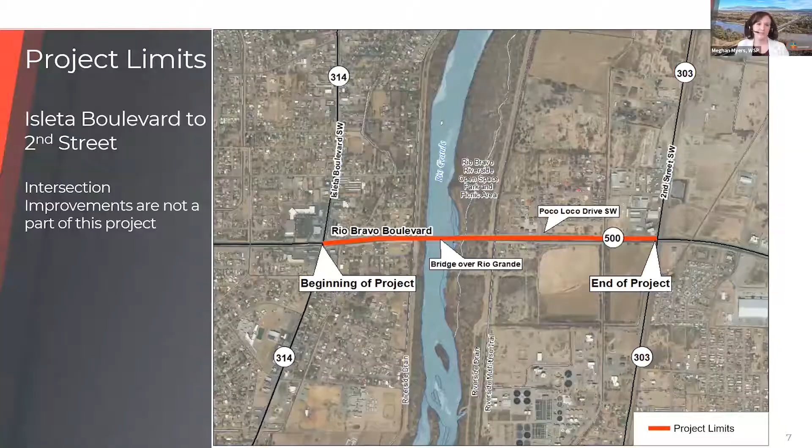Next, I'll pass things to Jill to give a brief overview of some of the ongoing work that has been happening on these bridges.

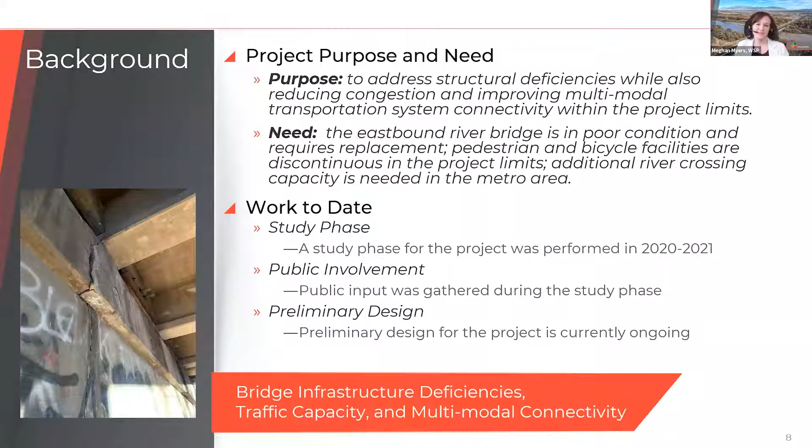At the end of 2019, one of the NMDOT bridge inspectors noticed a bump on the bridge deck that led to an emergency inspection of the eastbound Rio Bravo Bridge over the Rio Grande. It was discovered that the bridge pier was in need of immediate repairs. Traffic closures were put in place to remove loads from the bridge for the safety of the traveling public until the repair could occur. We know how frustrating this was, especially when you were driving through and not seeing the work that was being completed.

During the repair, work was occurring under the bridge, and since sections of the bridge had to be lifted off the pier, the eastbound bridge had to be closed to traffic completely. Since this was an emergency situation, the project had to move forward as quickly as possible.

This upcoming project we are discussing tonight is different. In contrast to the emergency, this project was programmed during the 2018 statewide transportation plan update. It is not in response to that emergency, but because of the condition rating of the bridge and the fact that it is at the end of its overall lifespan.

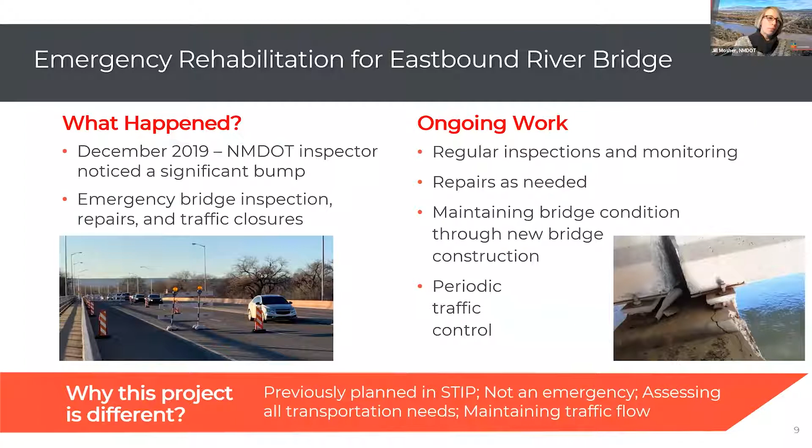Next, I will recap some of the topics we covered and the feedback we received during the previous public meeting that was held for this project.

During the study phase for the project, a public meeting was held on December 9th, 2020. During that meeting, we reviewed various treatments and alignment alternatives being considered for rehabilitation or replacement of the bridges. This meeting was recorded and is still posted to NMDOT's YouTube channel for anyone who wishes to watch or rewatch it. A MetroQuest survey was also performed to gain public feedback on important issues and aspects of this project.

The project team received lots of public feedback through submitted comments as well as through the MetroQuest survey. Here you can see some of the key concerns and topics of interest from this feedback, including focuses on safety, environmental impacts, traffic, and noise.

A desire to have construction start and end as soon as possible was expressed, while also prioritizing safety. Public feedback also included concern over ensuring there would not be complete closure of the bridge to traffic, the expected increase in level of traffic on Rio Bravo, and access to trails and parks near the bridge. Environmental impacts, including noise concerns, were also a common theme in the feedback we received.

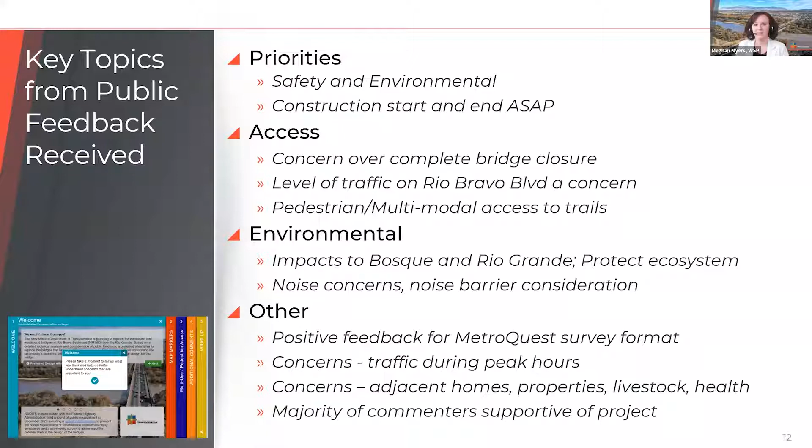NMDOT and the project team carefully consider the feedback received from the public, along with other key factors, when choosing a preferred alternative to advance from the study phase. We'll elaborate more on the alternatives being advanced to the design stage in the next few slides, but some examples of how the concerns were taken into account are shown here. For example, a straight, partially offset bridge was chosen for the replacement, which requires fewer impacts to the bosque and properties than some of the other alternatives.

A 14-span bridge is being advanced, which reduces the number of piers impacting the river from the existing condition. There will also be no full closures of traffic during construction, including maintaining 2 lanes of travel in the peak travel direction. Lastly, a noise study has been performed to determine the areas where noise barriers would be feasible and able to reduce the noise decibel level. Continued evaluation of the reasonableness and cost effectiveness of these locations will be performed during the design phases of the project.

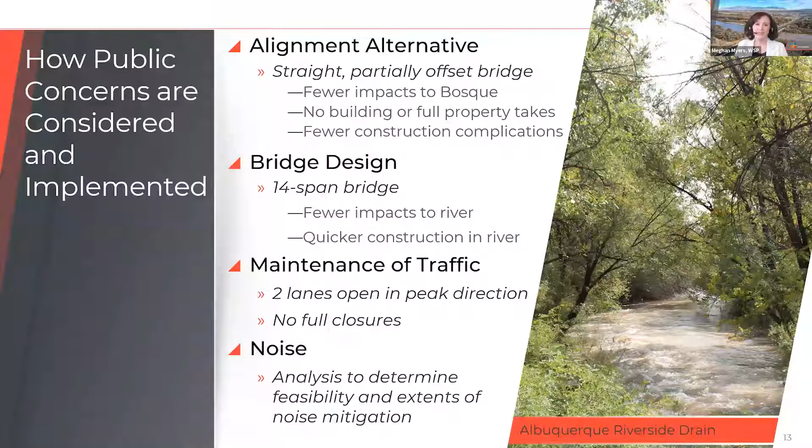Next, we'll give some more detail regarding the proposed improvements for this project. The recommended alternative being advanced to the design stage of the project includes the following.

As I mentioned before, there will be a new 14-span bridge that will be constructed using steel girders with a concrete deck that will carry both directions of traffic across the Rio Grande. The bridge will be offset to the north from the current bridge location by about half of the bridge width.

A new 2-span bridge will also cross the Albuquerque Riverside Drain to the east of the river bridge. This bridge will be a concrete slab bridge carrying both directions of traffic, and the open drain below the bridge will be replaced with a closed pipe culvert. The current drain and overhead bridge that's there now can be seen in the middle photo on the right of this slide.

The concrete box culvert on the west side of the river that carries the local access road underneath Rio Bravo Boulevard will be removed. This culvert and access road can be seen in the bottom right photo on the slide. In the new configuration, the access road will instead cross under the first span of the new bridge, making access to the south side of the bridge a little easier.

Pedestrian access will also be reconfigured at both ends of the bridge to provide new inclined walkways to bring pedestrians down from Rio Bravo to the riverside trails below. This will improve connectivity around the popular park and trails in this area, and we will show a bit more detail on these improvements in a few slides.

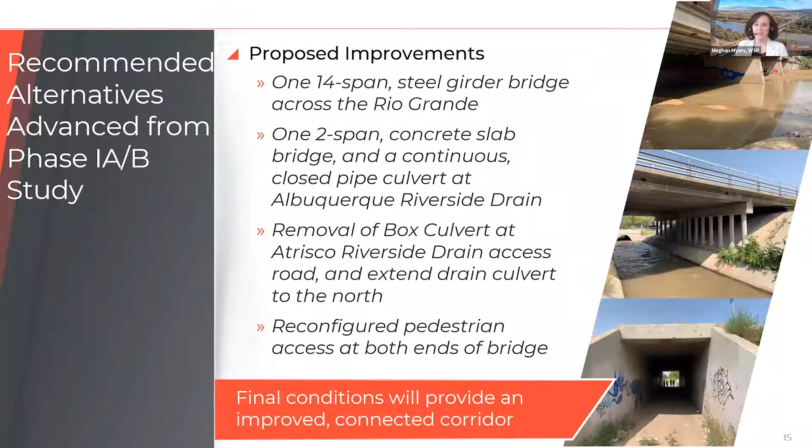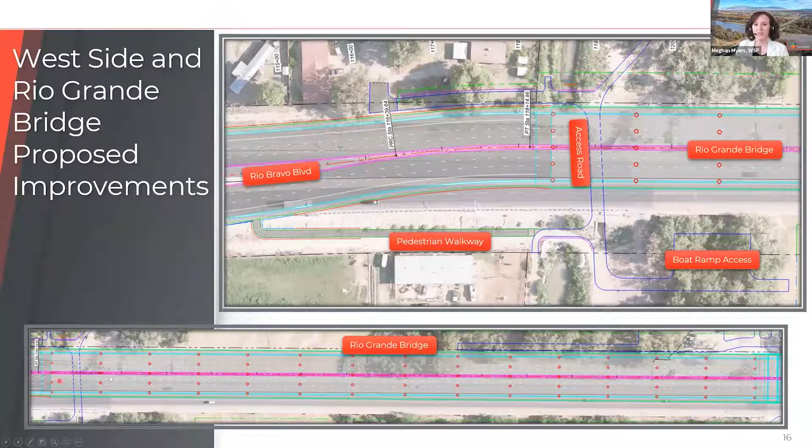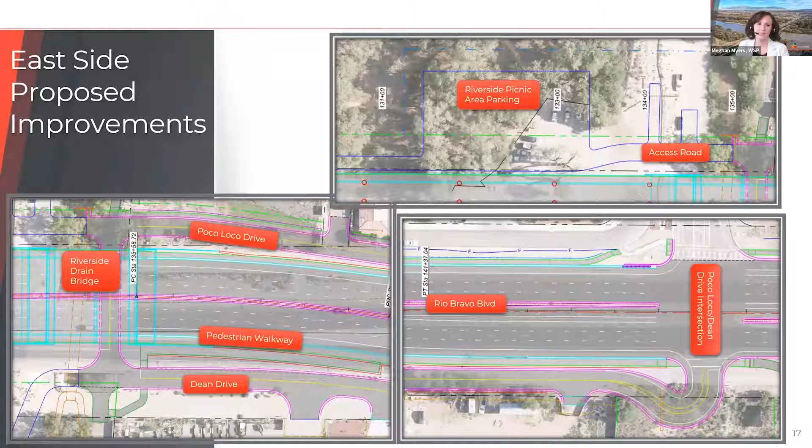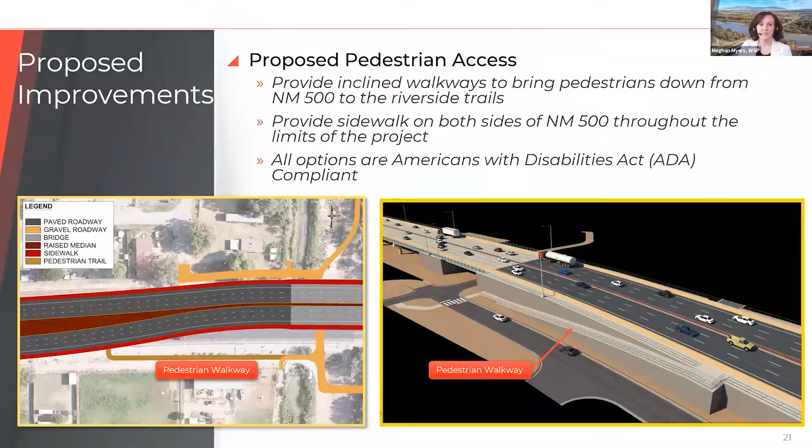And with that, I will turn it over to my colleague, Jim Heimann. Thanks, Meghan. I will summarize key aspects of the maintenance of traffic during construction and adjacent construction projects along Rio Bravo Boulevard.

As Meghan indicated, the new bridges will be offset to the north of the existing bridges. The first major construction phase will be to build the north half of the new bridges as close to the existing bridges as practical. The new north half will include a sidewalk and enough width for 3 travel lanes. Traffic will remain on the existing bridges while the new north half is constructed.

Tying the new offset bridge into the existing roadway may require lane reductions in the westbound direction. These are the transition areas, and lane reductions are expected to provide enough room for the equipment machinery, as well as to provide a safe work zone for construction workers.

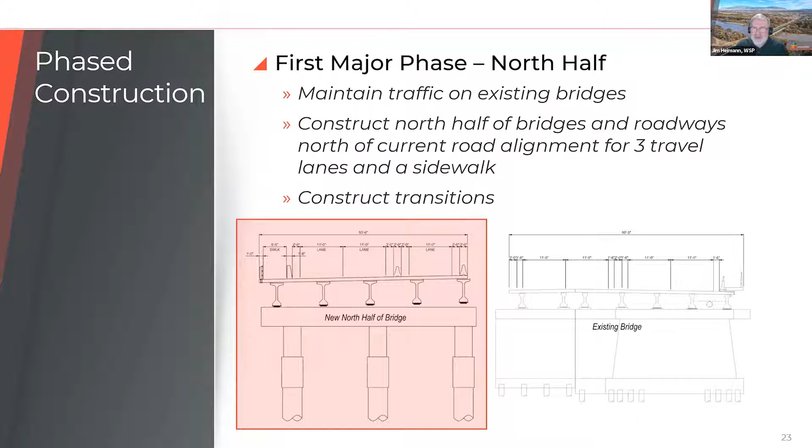The second major phase will be to demolish the existing bridges and construct the remainder of the new bridges, or the south half. Traffic will be moved to the newly constructed lanes on the north side. Movable barriers will be used to provide 2 lanes in the peak travel direction, 1 lane in the lower volume direction. This is expected to be 2 lanes eastbound during the morning hours and 2 lanes westbound during the afternoon hours. There will be several subphases to these 2 major phases. The actual construction sequence has not yet been determined.

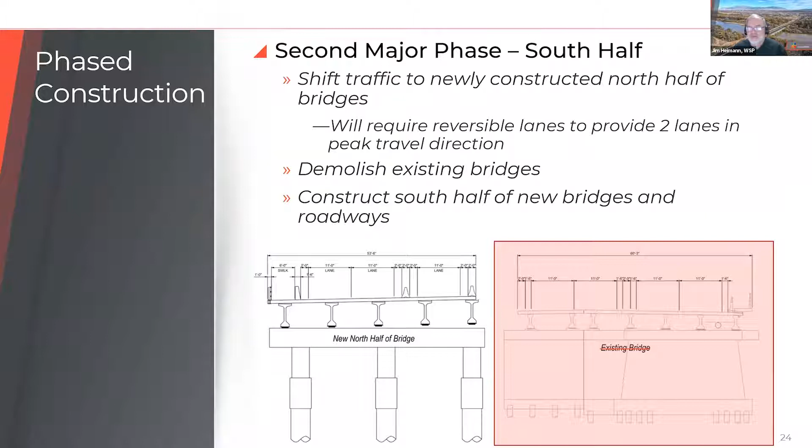This slide illustrates the movable barrier on the new north half that will have 3 travel lanes. The road zipper is a specialized machine capable of moving the wall barrier to provide 2 lanes in the peak travel direction. It is expected that this operation will occur twice daily.

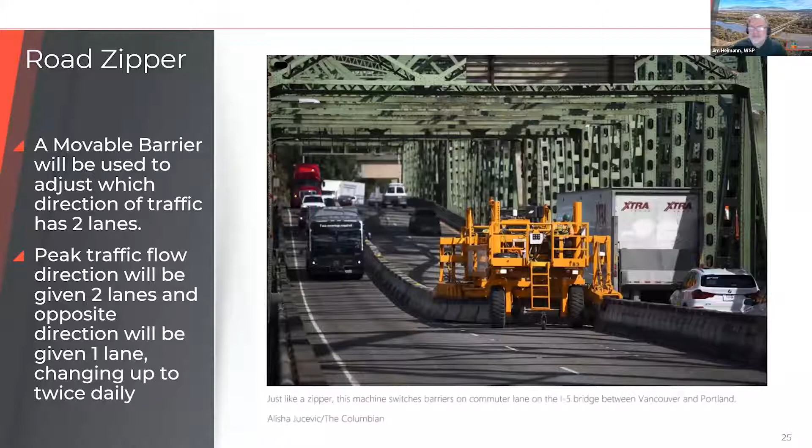Pedestrian and bicycle access will need to be maintained consistent with how these movements are accommodated today. This includes crossing the river on the bridges and crossing Rio Bravo on the local roads. Because the first major phase utilizes the existing bridges, pedestrian and bicycle travel will be much like today. However, the Riverside Park on the east side will be impacted by the new north half of the bridge because of the offset to the north. The details of how the Riverside Park will be maintained have not been determined yet.

Some disruption should be expected, including full closure of the picnic and parking area on the north side of the existing bridge until the north half is completed. This will be coordinated with Bernalillo County, who administers the picnic area.

The second major phase will utilize the sidewalk on the new north half of the bridges and along the north side of Rio Bravo Boulevard. Access to the Riverside Park should be better after the north half of the new bridge and roadway are constructed.

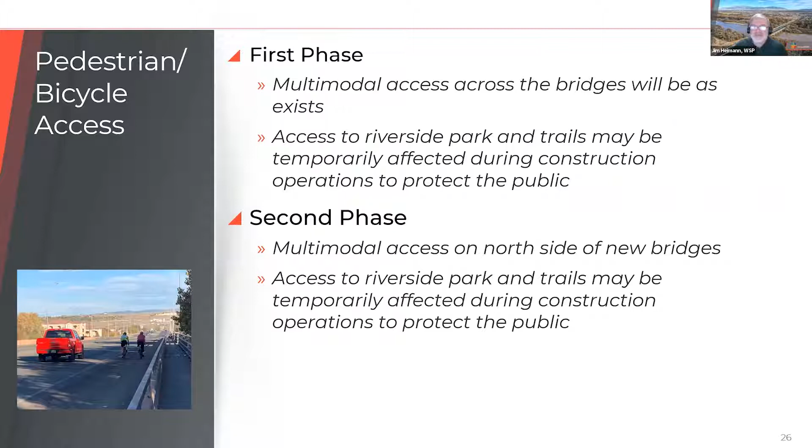When the bridge over the Albuquerque Riverside Drain is built and when the Albuquerque Riverside Drain is converted to an enclosed culvert pipe, full closures under Rio Bravo Boulevard are expected to be necessary. When this occurs, a temporary traffic signal will be provided at Poco Loco Drive intersection to facilitate crossings of Rio Bravo by pedestrians and bicyclists.

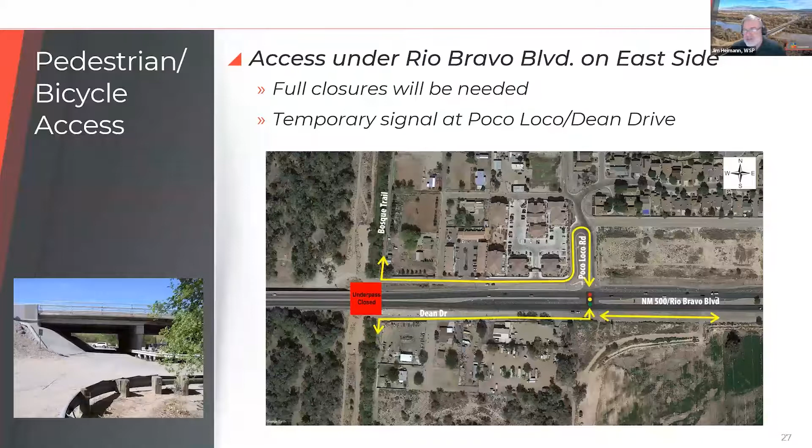Bernalillo County is developing 2 projects immediately east of the bridge replacement project. This includes the Rio Bravo 2nd Street intersection and a project referred to as the GAP project, which will complete the 6-lane Rio Bravo Boulevard roadway between the 2nd Street intersection project and the I-25 Rio Bravo interchange reconstruction project, which ended in the Prince Street South Diversion Channel area.

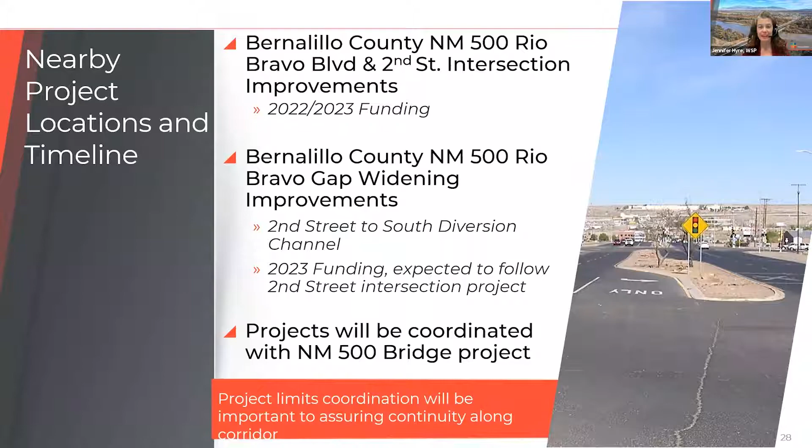When all these projects are complete, Rio Bravo Boulevard will have 3 lanes in each direction and sidewalks or trails from Isleta Boulevard to I-25. With that, I will turn it back over to Jennifer. Thanks, Jim. Next, I'm going to talk a little bit about the NMDOT's process for developing projects and the project schedule.

Currently, we're in the environmental analysis and preliminary engineering stages of this project. This is called Phase 1C and 1D by the NMDOT. During the study, Phase 1AB period, we identified what improvements were needed and why, and we evaluated the options that could be feasible to carry through to design and eventual construction.

After the prior public meeting held in December 2020, we incorporated the public and stakeholder input received to identify and advance the preferred option. We are continuing to refine the project elements and are working with our stakeholder agencies, such as Bernalillo County, MRGCD, and Bureau of Reclamation, to name a few, and your input is key to helping us further refine the preliminary engineering design and enable us to work towards drafting final design plans.

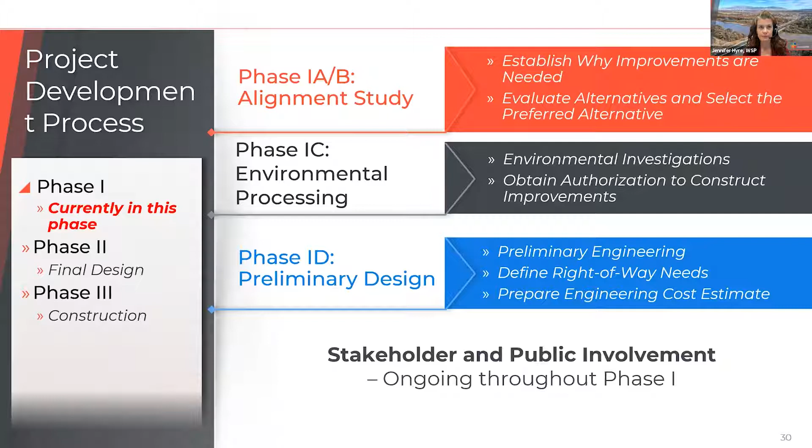Next, I'm going to talk a little bit about the schedule of the project. The project began in spring 2020 with the Phase A-B study. We then collected data to develop conceptual alternatives that were presented at the study phase public meeting in 2020. We completed the study in summer of 2021, at which point NMDOT had a preferred alternative to advance.

Into preliminary design and environmental analysis, which we've been doing this past year and into tonight for your input. We will incorporate the feedback received and continue to advance the project. The goal right now will be to finalize design roughly 1 year from now, with construction starting pending availability of funding.

Our next steps in the process will be to gather input from the public today and after our event. We've already been gathering some of that public input, and for those of you who have already sent us your comments or called us, thank you very, very much. It's very helpful. We will also be completing the environmental studies and the documentation, continuing to refine the design plans and develop final design plans. We'll identify right-of-way acquisition needs, and we'll prepare the project for construction letting.

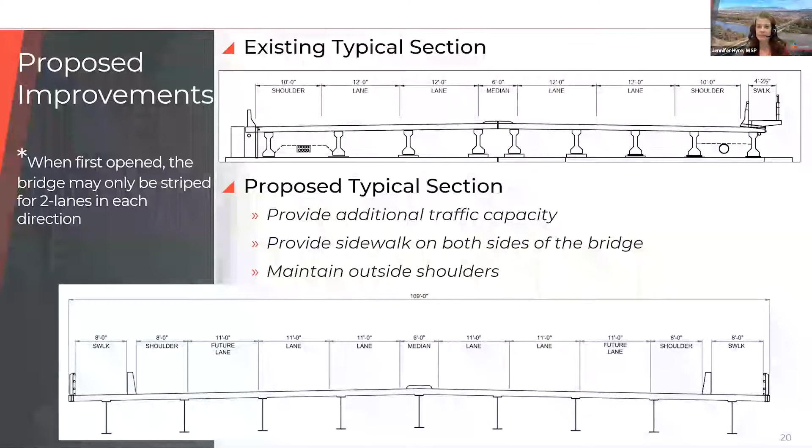Yes, I think -- thanks for the slide. You can see here, this is what the typical section will look like. So there will be a solid barrier between that walkway across the bridge. And as Jim mentioned in response to an earlier question, that barrier doesn't continue all the way along the corridor -- it will end, I think, around the Poco Loco intersection, but across the bridge there will be that divider.

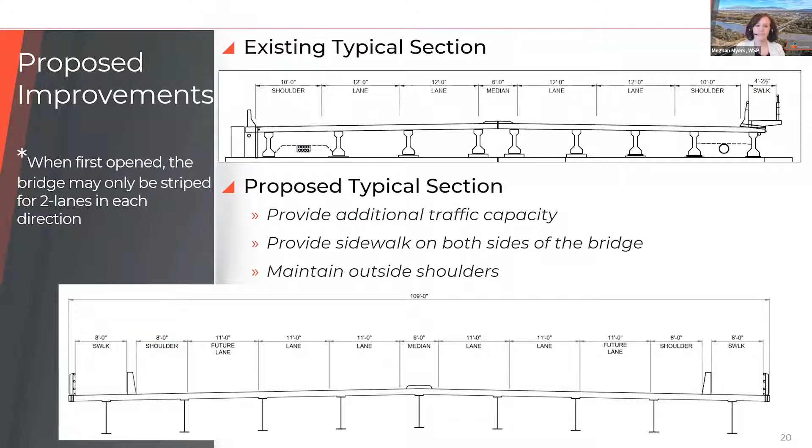Great, thank you Meghan. Another question from one of our online listeners: has some money been earmarked for this project construction already? That's a good question. Jill, do you want to talk about the money that is currently kind of funded for project construction? Yes, so currently we have the design funded.

When we look at the STIP, we have construction currently listed in 26-27, but our intent and ongoing efforts is to have construction happen as soon as possible. The design team is doing a fabulous job, they are moving along to get this project ready so that if we do identify any funding sources -- like I said, I know Senator Padilla and I spoke before the session this year, he said this is one of his top 10 highest priority projects.

So I'm hoping that if not from this legislative session, depending on our federal targets, there's maybe some additional bridge money coming down through the federal infrastructure bill. But basically right now, to say we have funding, it's in 26-27, but we are looking for everything we can to move this project up. It is our deepest hope that this project can go to construction next fall.

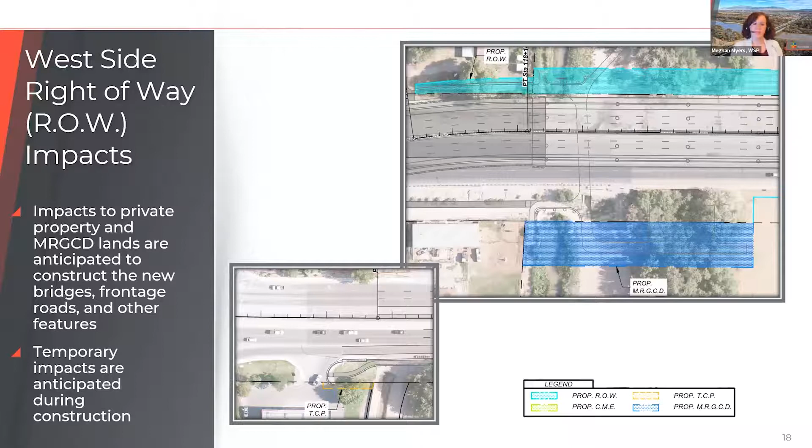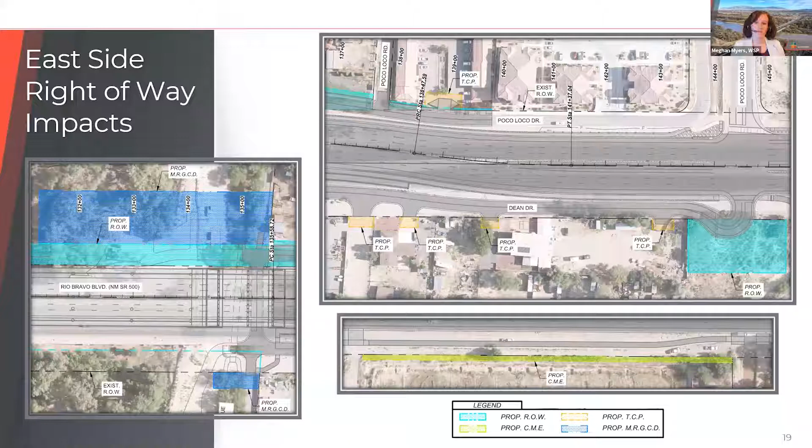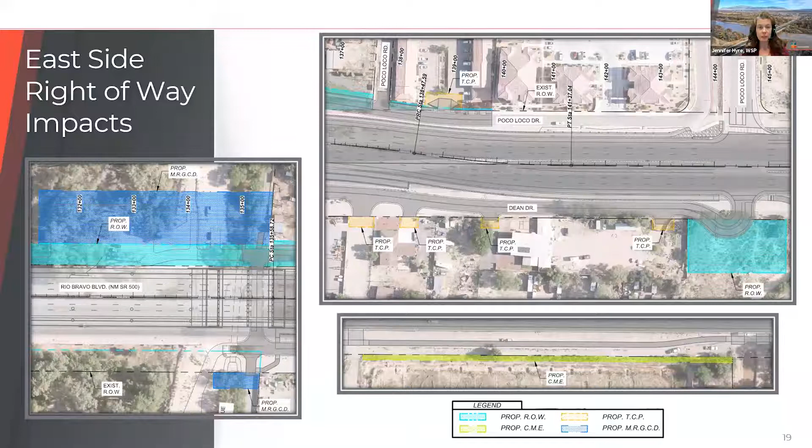Great, thank you, Meghan, and thank you, Jim. Just to add, for any private property acquisitions that would be needed, all of that would follow the standard NMDOT right-of-way process for acquisition and valuation. So thank you to all of you for helping with that.

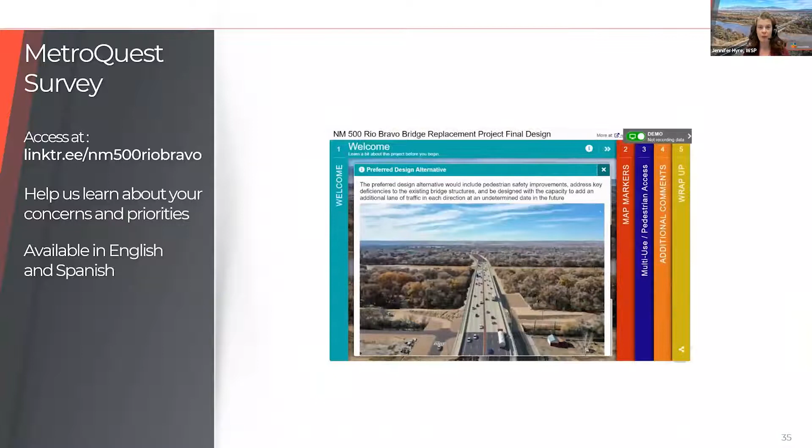I just wanted to say that I really appreciate everybody's participation tonight, especially from the public. This project is a priority for the district, as you can see from the presentation tonight. We're working hard to secure funding to move forward with that.

I also want to give special thanks to the elected officials, especially Senator Padilla, for his support of this area. The New Mexico 500 corridor, which is Rio Bravo, has been under reconstruction for a couple of years. You guys have probably seen the I-25 interchange reconstructed down to New Mexico 47, which is Broadway. This is kind of a continuation of it. There's also been support from Bernalillo County on some of the projects we spoke about, between the bridge east of this project.

I would remind individuals to be patient. There will be disruptions, delays and impacts from construction. I know there was a parallel drawn earlier tonight between this and the US 550 corridor. I don't think that parallel necessarily fits — traffic is kind of different in this area compared to that northwest corridor. If anybody's familiar with further south in Valencia County, in Los Lunas, this is going to be more akin to the New Mexico 6 bridge replacement, which had lower impact than the US 550 bridge.